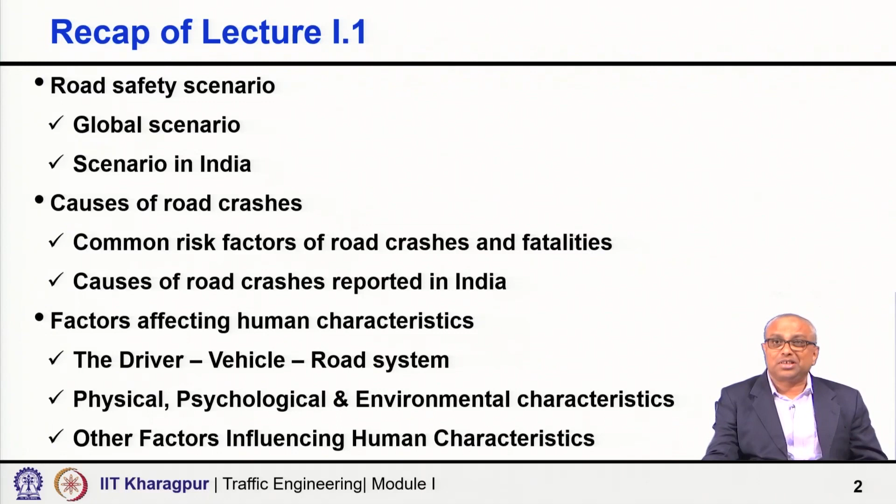Then what are the causes of road crashes, common risk factors of road crashes and fatalities, the causes of road crashes as per the available data in India, the factors affecting human characteristics, the driver-vehicle-road systems, the physical and psychological or environmental characteristics that influence human characteristics, and the other factors which are also influencing human characteristics. Now, with that background, today we shall first focus on the road safety engineering aspect and then the crash data.

Road safety engineering is a competence and experience in the investigation and analysis of crash locations where crashes are happening and/or potential crash locations. So, it could be a location where, as per the data available with the authority, we know that a significant number of crashes are happening, or it has the potential to be a high crash location in the future based on certain identified deficiencies, and the design of effective remedial engineering treatment. All the components are included.

It is a multidisciplinary subject and the elements may include crash investigation, crash reduction, crash prevention. And understand that both prevention and cure should be inherent elements of an overall road safety management system. Cure means you have a problem which is already identified. So, we know the problem, and we have to offer a medicine for that, cure it. But not only the cure, also the prevention.

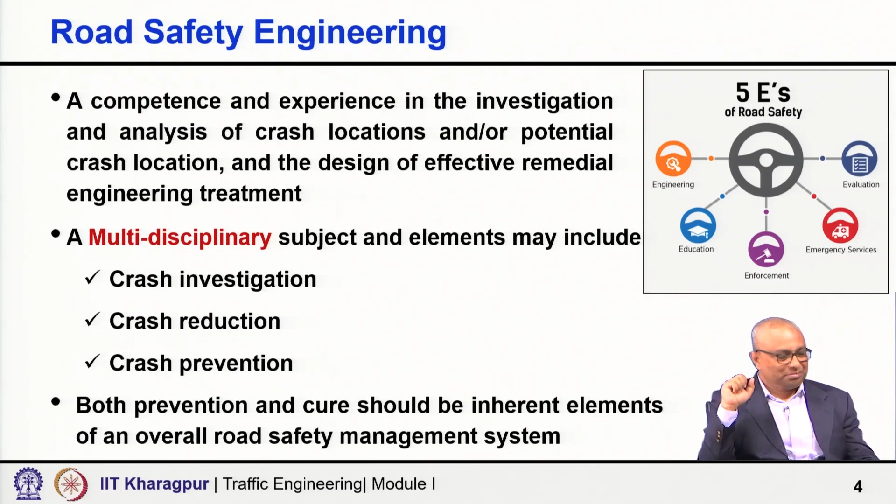What are the different ways to deal with road safety issues? We discussed the various road safety issues in the previous lecture, but what are the different ways to deal with them through the eyes of road safety engineering? There are broadly two approaches, proactive approaches and reactive approaches. What is reactive, what is proactive?

You can probably understand the meaning, but let me tell you, reactive means the problems are happening, crashes are happening, fatalities are happening, and the recorded data shows that such problems are occurring more frequently than expected, at a statistically higher rate at certain locations than others. Then you know there is a problem, it is a problematic location. So, you try to address that problem, find out what is really causing it, and what medicines or countermeasures can solve it. That is basically the reactive approach.

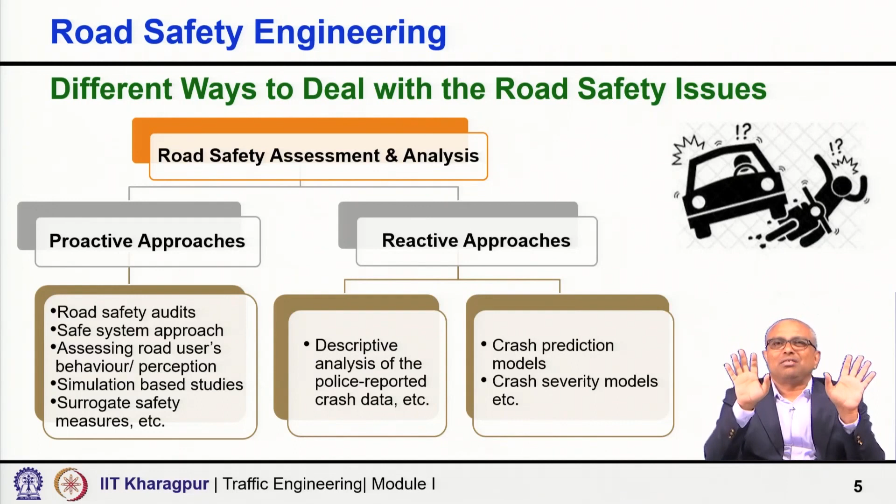So, both proactive and reactive approaches are ways you can handle road safety issues. As I have mentioned already, a few slides are there. Reactive approaches are associated with identification of locations experiencing safety problems; we call it screening.

Identifying locations which are experiencing safety problems, how to do the screening. So, it includes screening, then the problem definition, that is, I am referring to the diagnosis part of it. So, screening, diagnosis, and then I have to treat also. You cannot say only you have a problem, you have to tell the medicine. So, the identification and implementation of countermeasures, that is the cure. So, reactive approaches are associated with screening, diagnosis and cure, all the three stages.

There are certain downsides of these reactive approaches, as I have already told, but let me just quickly go through it once again. Solely depend on crash data. You are depending too much on the crash data, and understand that crash data itself is a big issue, especially in low and medium income countries. The systematic data may not be available, the right data may not be available in the right format or required format, all the information that is relevant may not be recorded. All sorts of issues are there. So, you are depending so much on the crash data, where availability of correct and complete crash data itself is a big challenge in LMICs.

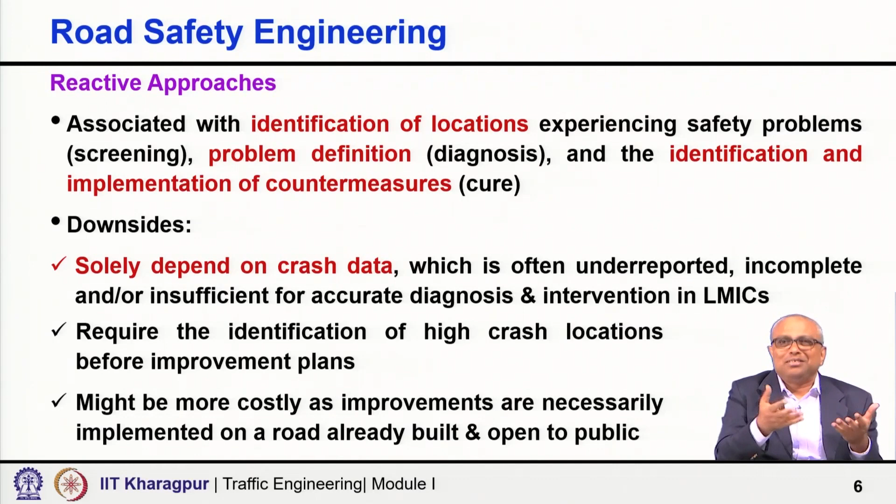So, essentially any interventions, if at all you can do. In some cases you may not be able to do all the interventions. So, your solution space will often get very restricted, because you cannot probably rebuild the entire thing. You face issues like land acquisition related issues also, but even if you are able to do something, you are actually interfering with the system. You are trying to redo, even partially, or doing some intervention on a system which is already built and open to traffic. So, anything you want to do is obviously going to be more expensive.

On the other hand, the proactive approaches are associated with prevention of the safety problem, how I can prevent, right, before the accident occurs. So, associated with the prevention of safety problems before they manifest themselves in the form of a pattern of crash occurrence. Obviously, as compared to the reactive approaches, the proactive approaches will have definite advantages, which may include first the crash prevention. It is not necessary for crashes to occur before crash prevention measures are taken. You do not wait for the crash to happen or people to get killed before you take the action, right.

You look at the potential safety and crash potential, right. You do not wait for the crash to happen, but you try to assess the crash potential based on available scientific knowledge, evidence and available expertise. And obviously, this will have lower cost, because in many cases you will take the interventions before you have actually implemented and executed the project, right.

So, you have not built an intersection and then getting more crashes and then trying to see what is wrong. Even before you build, probably at the design stage itself, you can audit and you can see what is wrong, that there is an issue of sight distance, and that based on the land use, heavy pedestrian movement requirements will be there. So, I need to provide for it when I am widening the roads, and you make appropriate changes in the design itself, and the construction is done accordingly. So, you are actually saving cost.

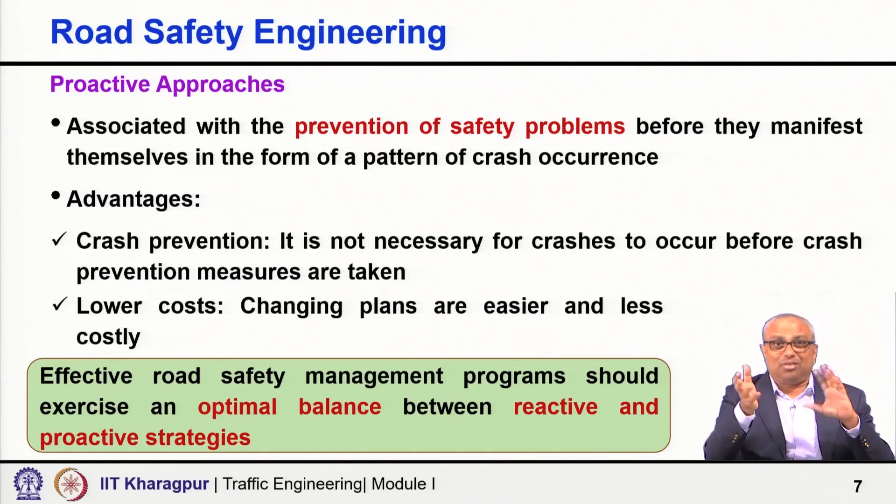Also at the same time, you need to follow the proactive approaches, because not everywhere will you wait for things to happen and people to get killed or injured and so many crashes to occur before you wake up and start doing some intervention. So, an optimal balance of both reactive and proactive strategies. Now, going to the crash data, which I said is very important especially for the reactive approaches.

Why do we need crash data? Because road authorities need to have crash data to reduce crashes and the severity of crashes. I must know where the crashes are happening. That is the first thing any authority would be interested in, because that is the reality, not a speculation or an assessment, but the real data. The real data always will have a big strength.

I must know whether whatever I have done is actually reducing the number of crashes. Maybe you have done an intervention. How effective is that intervention? Is it working properly? Is it really giving me the result? I must know, I must have the crash data.

The accuracy of investigation, analysis and effective treatment at a crash location relies on the availability of comprehensive data and the quality of the data. How comprehensive is the database and what is the quality of the data? Do I have all the information available? Road related, vehicle related, weather related, driver related, and do I have really correct information? So, it has got a value.

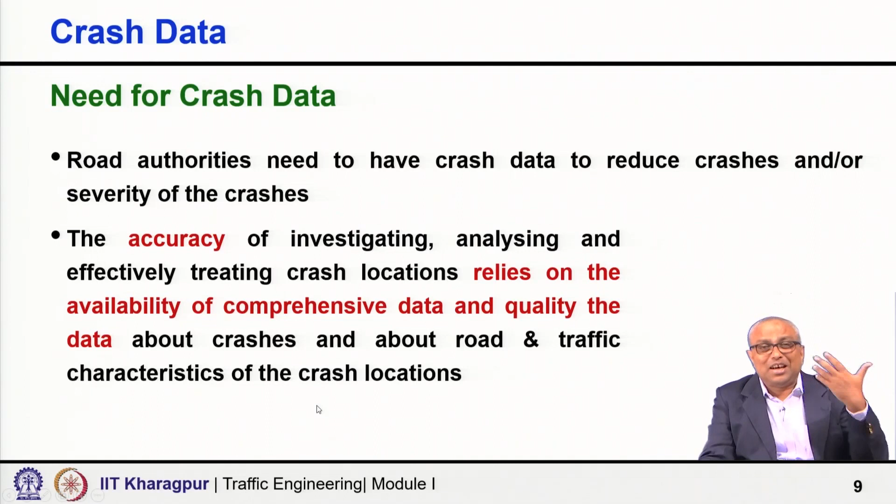You cannot depend only on the proactive approaches, and you also cannot depend only on the reactive approaches; an optimal balance is important, and therefore the crash data is also very important, because your output will be as good as your data. If the data is wrong or incomplete, you will have less confidence in whatever outcome comes from the analysis. Now, good crash data is a necessity. If you have good crash data, so many things are possible.

What are the characteristics of good crash data? When can we say my database is good? I have listed some points, not all. Crash locations I should be able to pinpoint. I know at which location the crash has happened. In the traditional sense, you will say it happened somewhere near this. Near this could be anywhere. You do not know exactly where it happened. But if I am using a system where the GPS coordinate is exactly located, it tells me it happened right at this location.

The sequence of events in a crash is properly mentioned, how it occurred, how it led to this. Maybe it started raining, it was night time, and this was the type of vehicle; you should be able to get the whole thing. Then the contributing factors in a crash or group of crashes are mentioned. I should be able to identify that all those data are available.

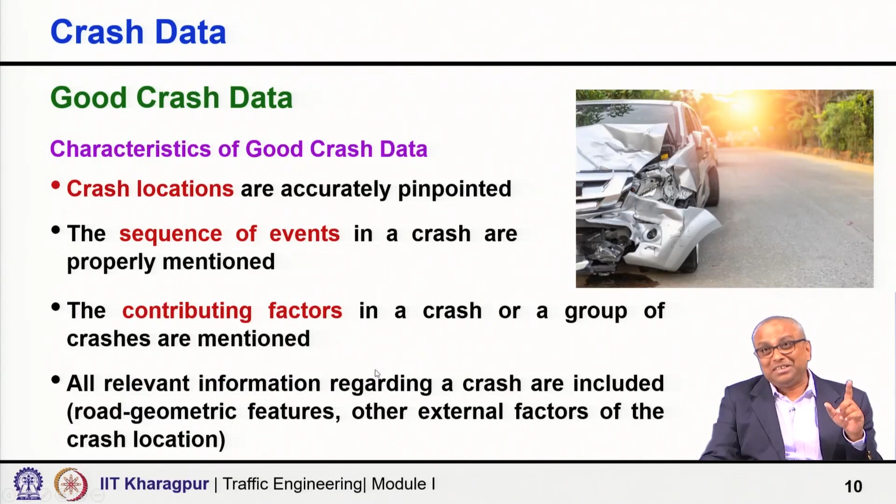Now, if we have the good crash data, as I said, what are the characteristics? Some predominant characteristics, but if we have those types of data, then what can we do? Lots of things. Common risk factors across a number of crashes can be identified, not only location specific, but you can see it in a bigger sense: what are the common risk factors across a number of crashes. Is speeding always coming, or is it poor road geometry, the weather condition, whatever it is, it can

be identified. The cost of consequences of a single crash, all crashes at one location, or several crashes with common factors can also be identified, because you have the data saying what exactly happened because of the crash or crashes. Fatality, severe injury, property damage, maybe multiple people also died in a crash. So, the cost consequence of a single crash, all crashes at one location, or several crashes with common factors can be identified. Similarly, several crash sites can be identified and you can also rank them.

So many junctions or mid blocks, every kilometer or half a kilometer small sections, you can say where more things are happening. So, you can rank them, and then you can pick them up one by one and try to see what is happening, or locations which are having higher crashes than expected.

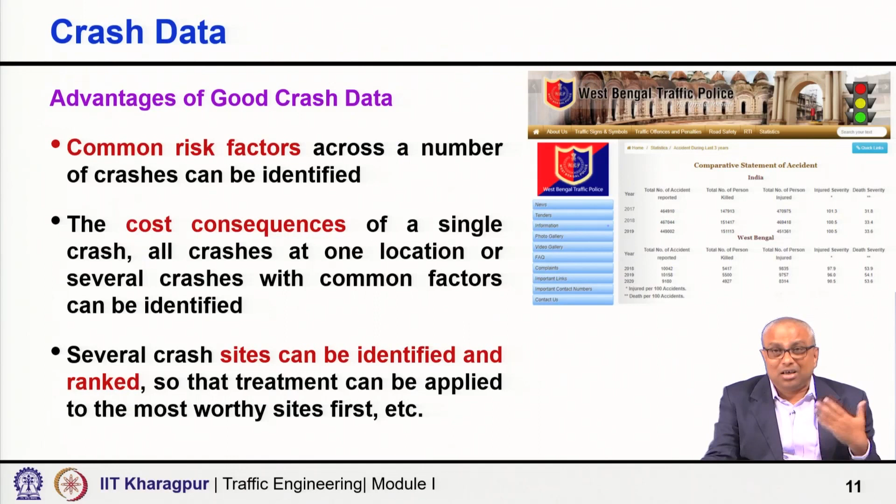The crash data source: where can we get the crash data from? You can get it from a primary data source, you can also get it from a secondary data source; some of the things are complementary, because so much data you can get from the primary source. For example, the road authority will have the crash data, the police crash report form, the police FIR, they are writing so many things, and sometimes a crash database could be there. In many of the states in India, including the state of West Bengal, we have a very good database.

Yeah, it has improved a lot. So, the statewide database and the nationwide database will also be available. Nowadays, even nationwide there is a lot of effort to develop and upgrade the database. Lots of things are happening in truly positive directions. We have problems, we are number one in terms of fatality all over the world, but lots of good things are also happening. So, I am sure the future will change and we will be able to address our concerns effectively.

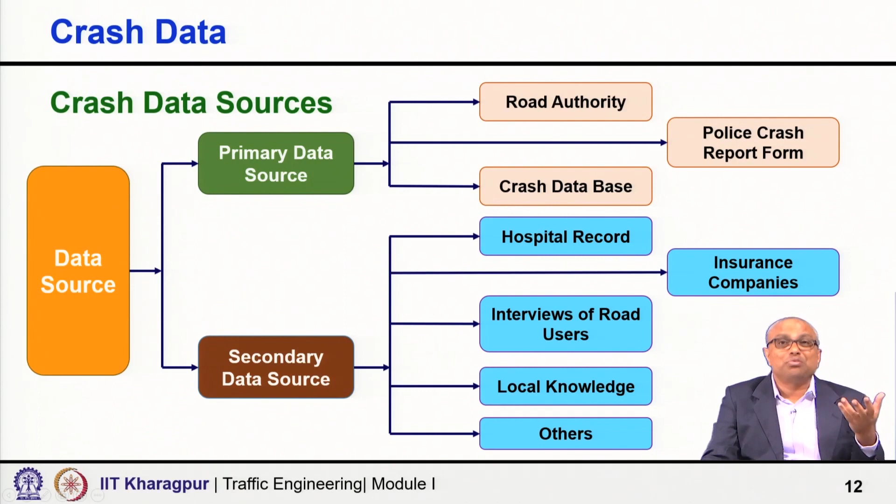Secondary data sources may include hospital records. Fatality did not happen immediately, but maybe after hospitalization. So, hospital records can tell you many things. Insurance companies, because insurance claims are linked. Interviews with road users, local knowledge, many other sources could be there. So, these are all secondary sources which also sometimes give you a lot of valuable and important information.

Coming to the crash data collection system, the traditional method followed in India in the majority of cases, or what we used to follow earlier, is the police reported FIR. The crash data is recorded in the police FIR with at least one eyewitness report, the summary is prepared by the police stations, and finally aggregated data is sent to MORTH on an annual basis. That used to be the condition.

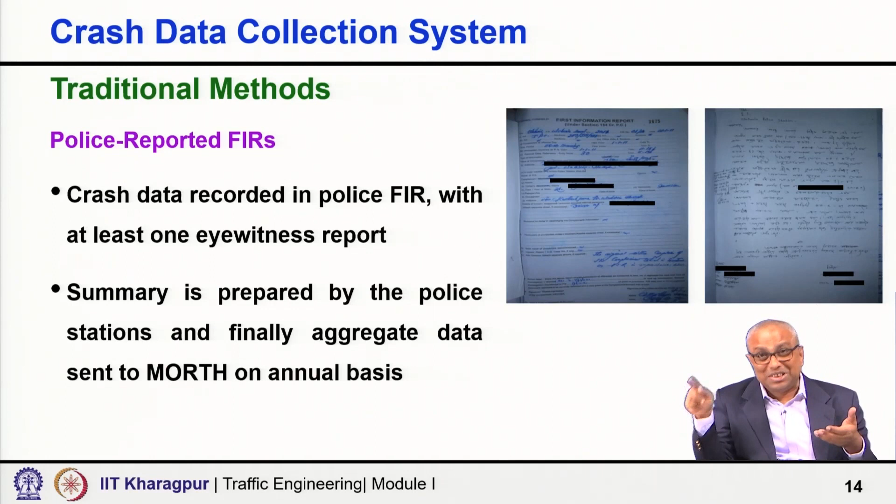So, you can see what the FIR looks like. We used to go and take a copy of the FIR, go through it, extract information, and create a digital database. Many times only hard copy, handwritten things were available. So, we used to go to the police station, collect those FIR copies, come back to the lab and note down the things. Sometimes they will not allow you to take a copy. So, you have to sit there and record the information you want, but that is the traditional way.

Then the ministry, MORTH, the Ministry of Road Transport and Highways, Government of India, came out with a format of broadly 17 items. There are many, but I have broadly grouped them into 17 items. This is for some kind of uniformity and consistency all over the country. It is the MORTH format you use for collecting data.

They include accidents by month of the year, and then area or time: in which month it happened, which area, urban or rural, at what time, classification of road, whether it is NH, national highway, state highway, MDR, other district road, village road, type of location. There are 13 items. So, what is the location, how you describe the location,

type of junction and traffic control, weather condition, vehicle types, age of vehicle, the nature of the accident, the causes of accidents, whether there is a fault of the driver of the motor vehicle, the type of victim, motorcycle, bicycle user or a pedestrian, the age, the gender, the details of drivers, the vehicle details, type of persons killed, road condition, road feature. Quite comprehensive and satisfactory.

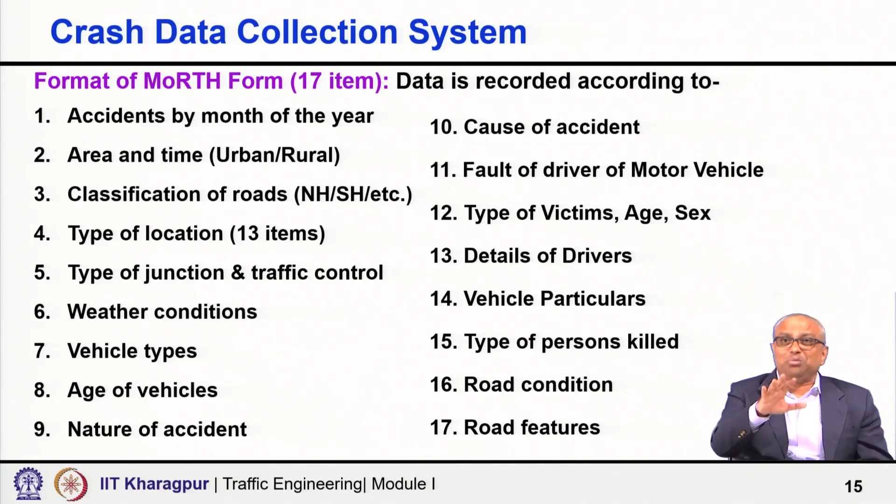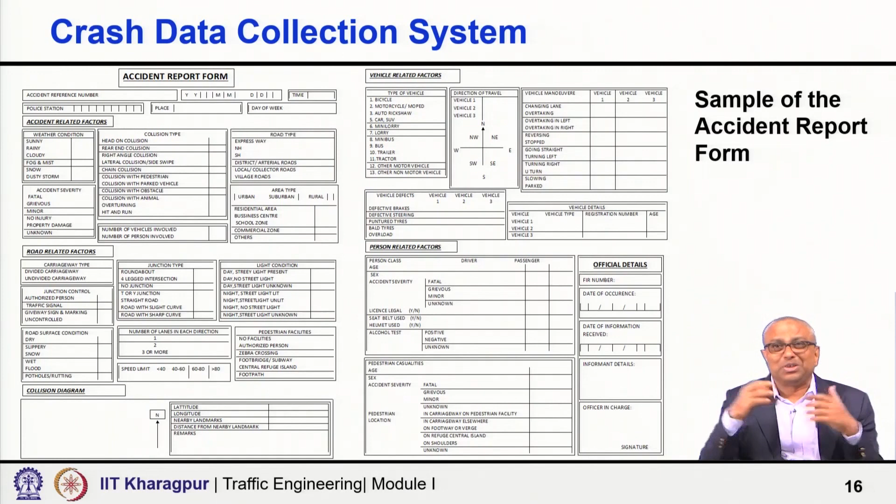So, the next attempt was uniform format. People were not recording every item in FIR or so. Now, you have accident data information recording procedure, a format, use that, get all the data in the prescribed format. You have IRC codes also, which tells you related to this. I am not going into details, but the IRC codes are also available.

Then slowly the shift is happening. We have smartphones, mobiles, and GPS things available, so many small simple equipment are coming in the market. The modern methods aim at data acquisition at source through mobile device. Some initiatives were taken by IIT Kharagpur, my colleagues who developed such things, using a smartphone. If you go to a location, coordinates are available, GPS will tell you exactly where it is, and many information you can feed there itself.

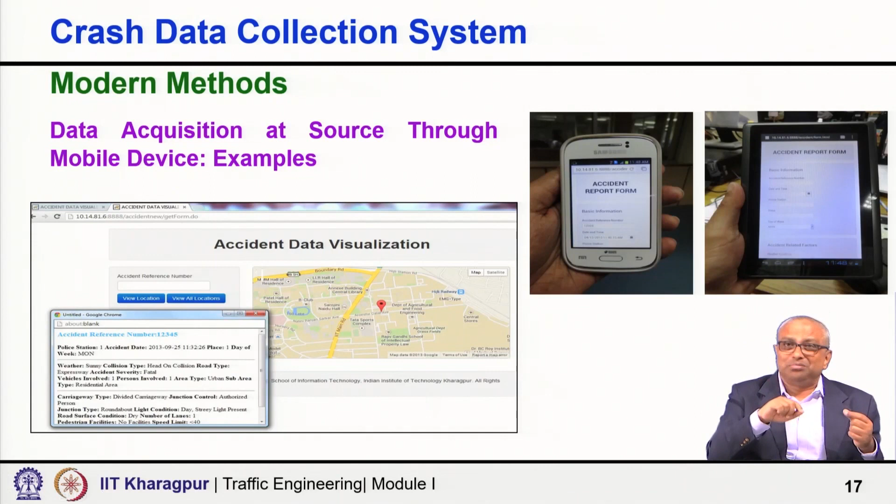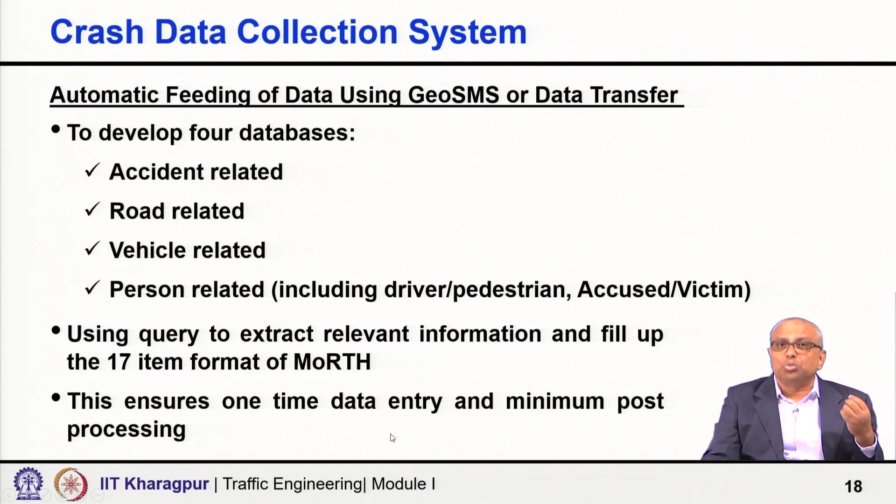So, you can do the visualization, and you can get more reliable data, and it will ask you to fill up every input. And automatic feeding of data using GeoSMS or data transfer develops four databases: one is accident related, then road related, vehicle related, person related, including driver, pedestrians, accused, victim. These are the broad components. Using query to extract relevant information and fill up the 17 item format of MoRTH, as I said. So there are 17 items. This ensures one time data entry and minimum post processing time.

So, what is happening now, proceeding further in the same direction, is use of IRAD, Integrated Road Accident Database. The Government of India has recently launched the Central Accident Database Management System. Six states are initially included in the project, now the number has increased. The IRAD mobile application developed will enable police personnel to enter details about road accidents along with photos and videos, following which a unique ID will be created for the accident, and engineers from PWD or other local bodies receive an alert, and everybody from their part inputs the data. Ultimately you get a very comprehensive data.

You get alerted, all concerned will get alerted, and then everybody fills up their portion and visits the site, and finally you have a comprehensive database. Lot of information about IRAD is also available in the public domain. Just open up the website, you can type IRAD, you can see IIT Madras also has got a lot of contribution, they developed this. Government of India is quite actively working, trying to implement this, and different states are coming under this IRAD system. So eventually every state has to come into this system probably, and these are all very positive news, because this will help the country have a very good and reliable database in the future. So that is what is necessary.

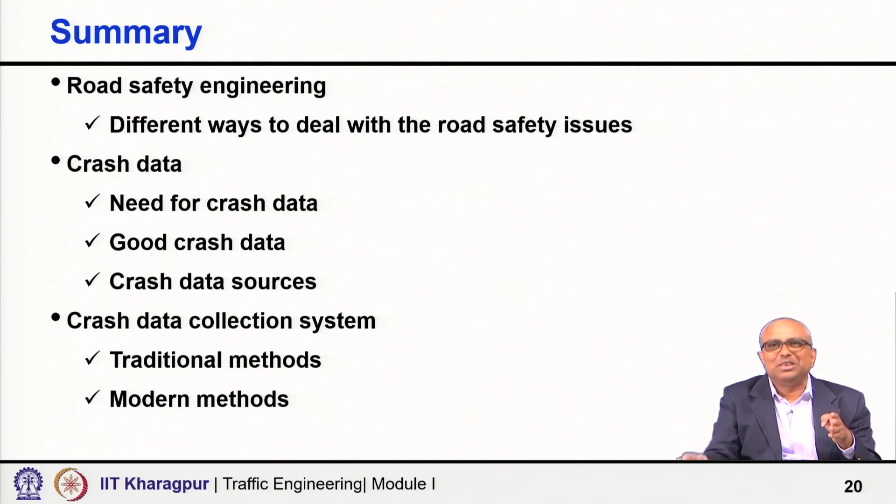So, what we discussed today is what is road safety engineering and what are the different ways to deal with road safety issues, proactive and reactive, their advantages and disadvantages, and finally a balanced combination of both proactive and reactive strategies. Then the importance of crash data, why we need it, what should be the general characteristics of crash data, what I should be able to achieve if I say it is good crash data, then the sources, and the data collection methods, traditional to modern, and even the development of IRAD, the contribution of IIT Madras and the Indian government's initiative, and more and more states coming and using the same platform.

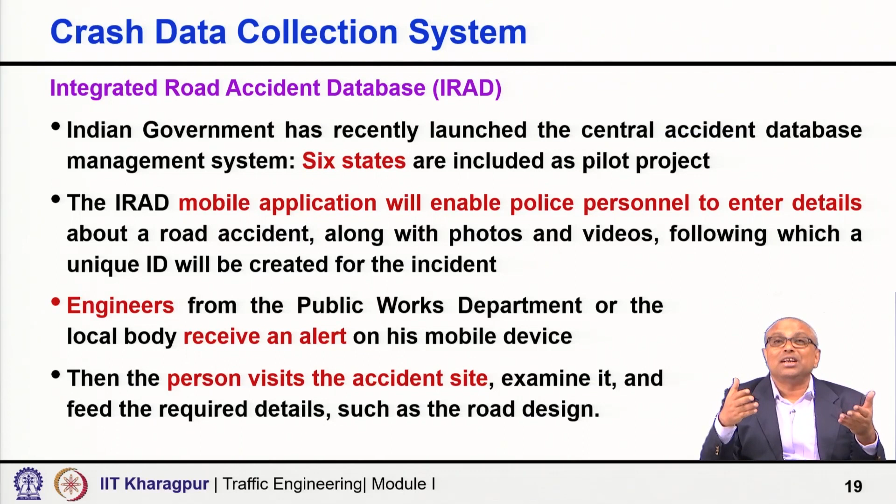The homogeneity, people using similar or same platform, in so many ways is very advantageous. And what is important at the national level, across such a big country, length and breadth wise, so many states, so many different geographical regions, if we all follow a systematic and unified approach and contribute to the development of a very reliable, complete and comprehensive accident database at the national level, that can add a lot and help the country address concerns related to road safety in an effective and efficient manner. So, with this I close this lecture. Thank you so much.